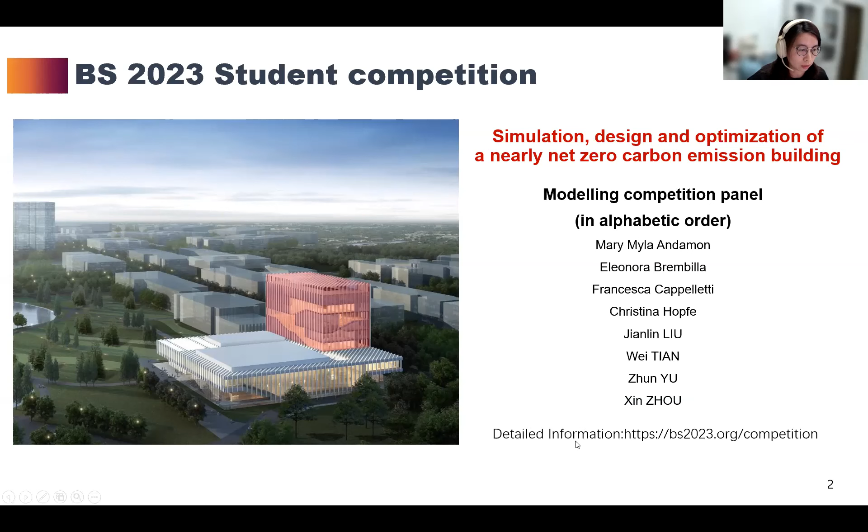For this year's competition, the aim of the exercise is to use computer simulation to design and optimize a building to achieve nearly net zero carbon emission. In setting the theme of this competition, we considered a variety of solutions, including big data analysis, urban energy consumption simulation, and so on.

In the end, we believe building carbon emission is a topic that countries around the world are concerned about at this time. Taking this as the analysis goal in the student competition can stimulate everyone's attention to this topic and has practical application value.

Given the availability of data, we narrowed the analysis down to a single building. At the same time, building carbon emissions cover the entire life cycle of a building and include a lot of content. To simplify and ensure focus, the optimized content only includes carbon emission during the building operation phase, mainly involving the carbon emissions of cooling, heating, lighting, and plug loads.

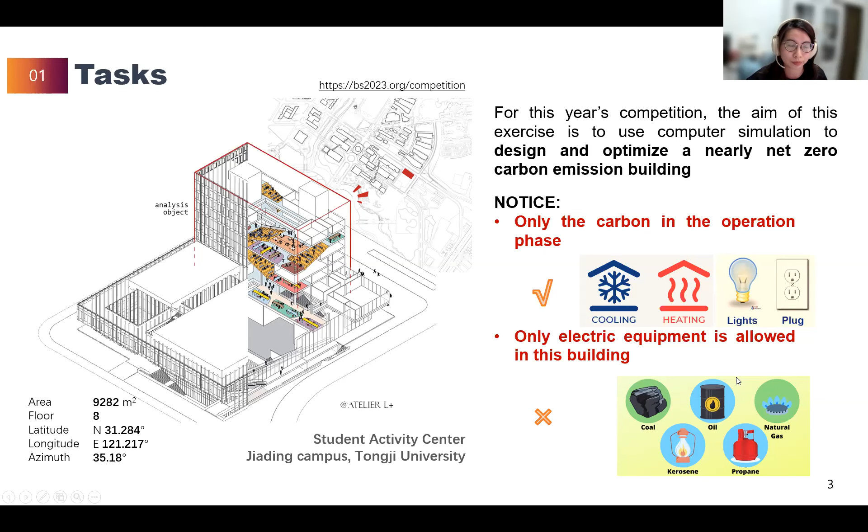It is really important that each modeling competition includes a new challenge. For this year's student competition, participating teams are encouraged to use active measures such as PV, battery, charging pile, or ice storage, and passive measures such as fluctuating room temperature, thermal storage in walls, controllable lighting, and other demand-side management for carbon reduction, which is caused by cooling, heating, and other plug loads in the operation phase.

At the same time, they should also ensure providing comfortable indoor conditions. In terms of methods, we have provided dynamic carbon emission coefficients as optimization constraints. Compared with previous years, the optimized goal this time is new, and the technologies that can be used have not been tried before, including the attempt of demand-side responses.

These contents give the contestants a lot of space for exploration. Entrants are free to propose the heating, cooling, and mechanical ventilation system, but must provide details of this in their report. All entrants must use validated building performance simulation.

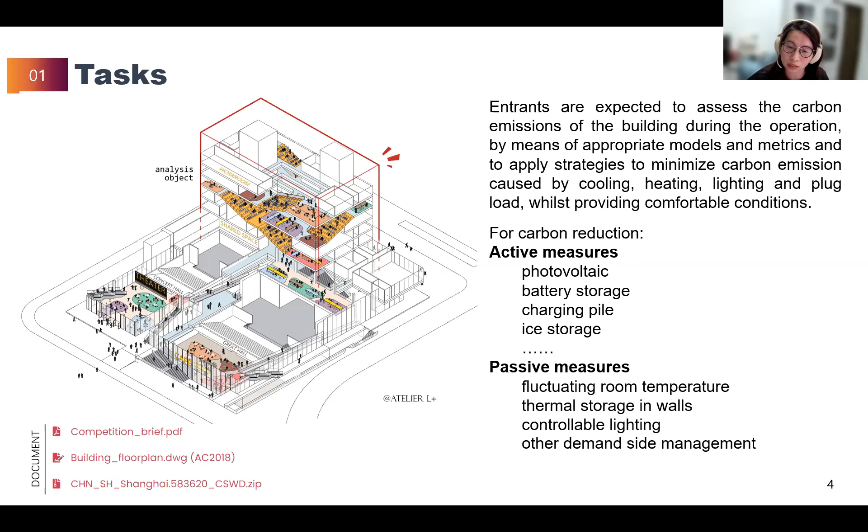First, we can take a close look at the building for analysis. The building selected for this competition is the Students' Activity Center of Tongji University in the Jiading campus in Shanghai, China. The reason for choosing this building is that, on one hand, this building is actually built, and it is also a high-performance green building.

During the BS 2023 meeting, it can also be used as a place to visit, so that everyone has a more realistic sense of participation. On the other hand, the building was designed by Tongji University, and the information is relatively complete.

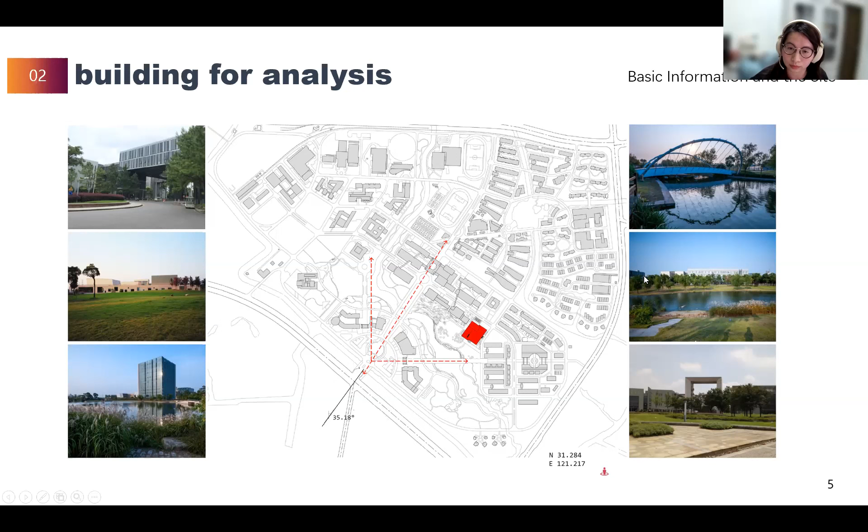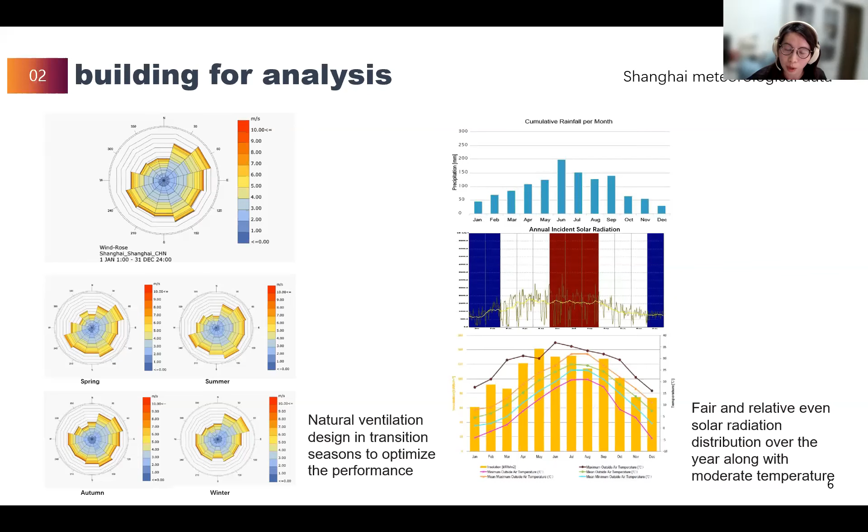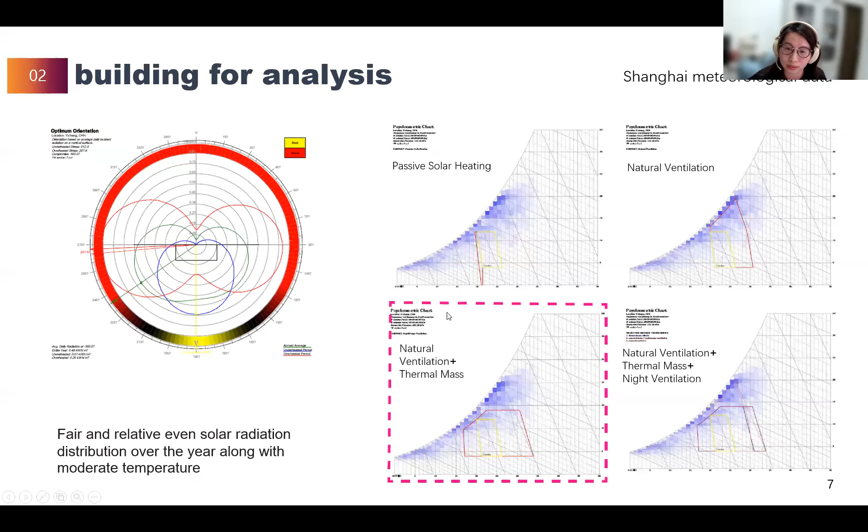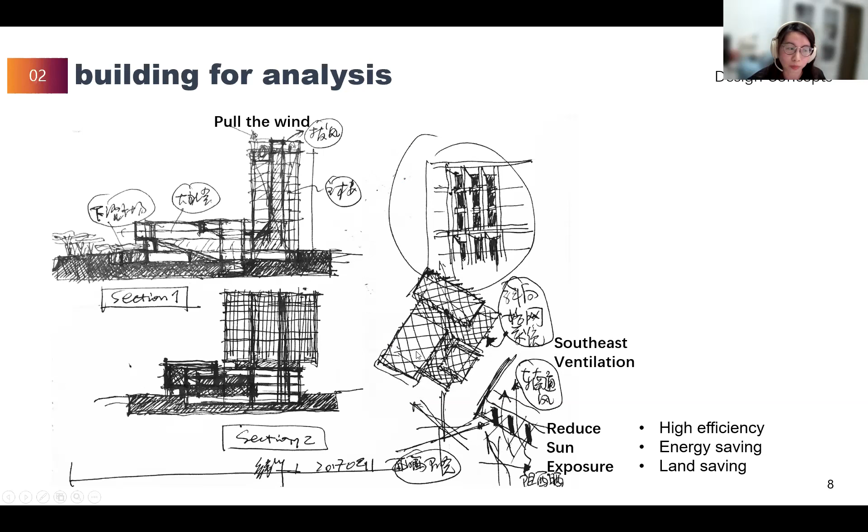The prevailing wind direction in summer is almost parallel to the building. The building facade is made of white concrete slabs, catering to the southeast orientation of the building, forming a vertical sunshade and natural ventilation system. Setting 45-degree angle louvers on the facade may well guide the wind into the room.

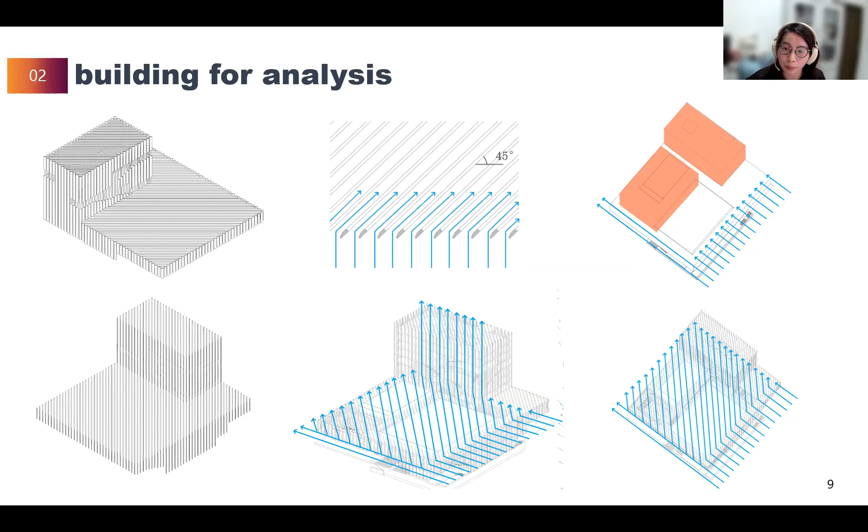In terms of the interior space design, emphasis is placed on the continuation of space to form a coherent flow of space sequence.

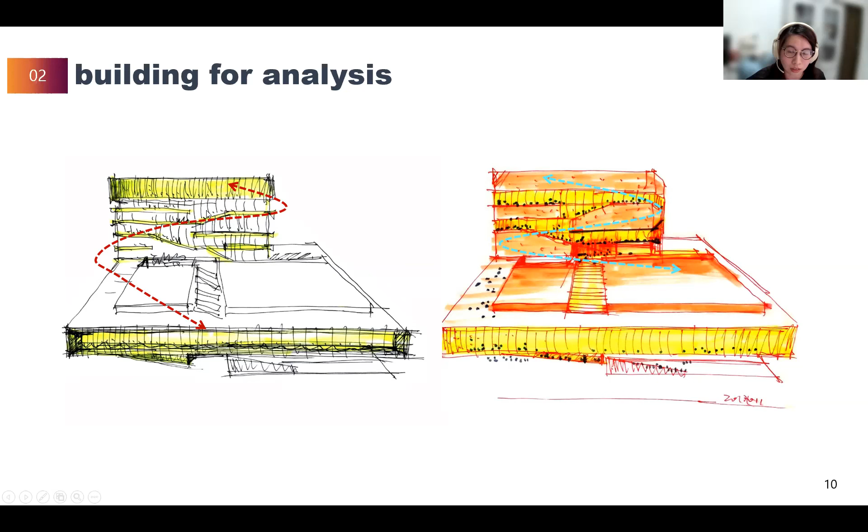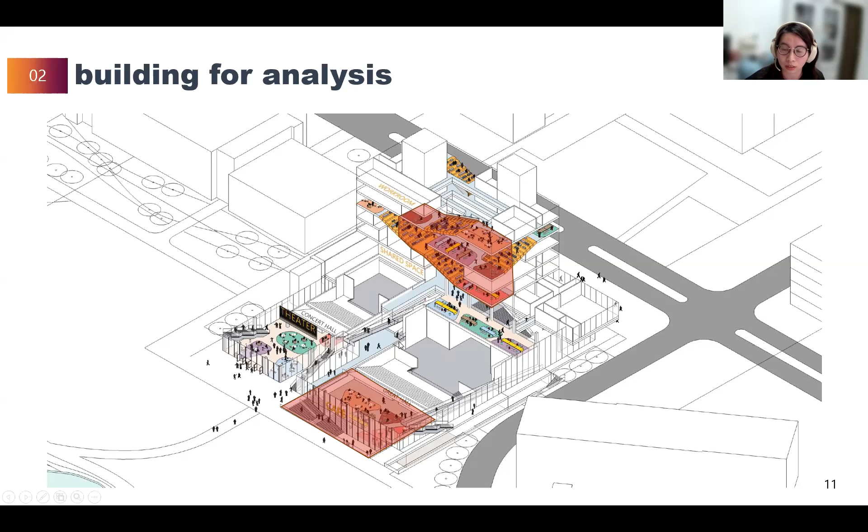In terms of function, a large number of roaming student independent activity spaces are set up. The slope space of the lecture hall on the ground floor is combined with the entrance, and the tower walkway form a continuous space. These have created better conditions for creating natural ventilation.

The total construction area of the whole building is about 21,000 square meters, of which the above ground part is about 15,000 square meters, and the underground part is about 6,000 square meters. The building covers an area of about 6,200 square meters with 8 floors.

It contains many functions such as office of the community, a multifunction hall, training rooms, and art classrooms, and so on. It is a multifunctional complex that provided spaces for offices, meeting, performances, and entertainment services.

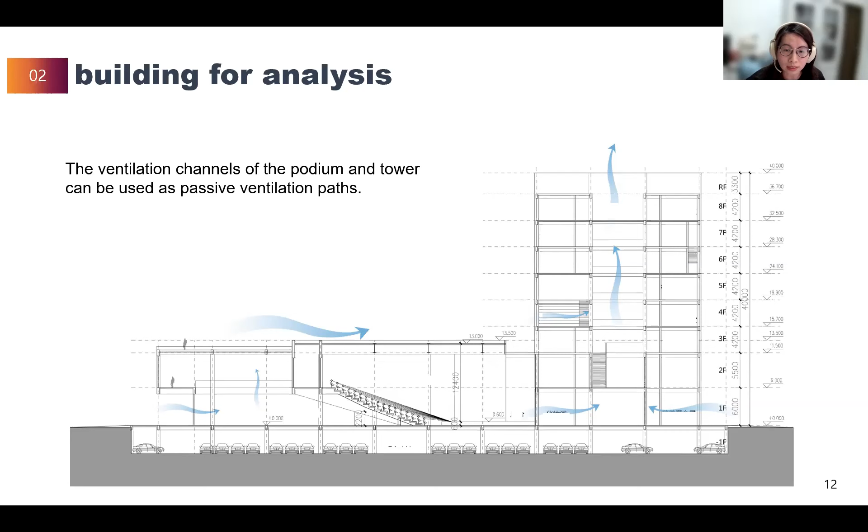Considering that the entire building area is relatively large and there are many complex functional spaces, in order to allow students to focus more on creative design and analysis, we adjusted the building spaces for analysis.

It should be noted that only the energy consumption and carbon emission of the tower part under the typical annual condition are studied, and the energy consumption of the podium part is not included in the analysis. However, the ventilation channel of the podium and the tower can be used as passive ventilation paths.

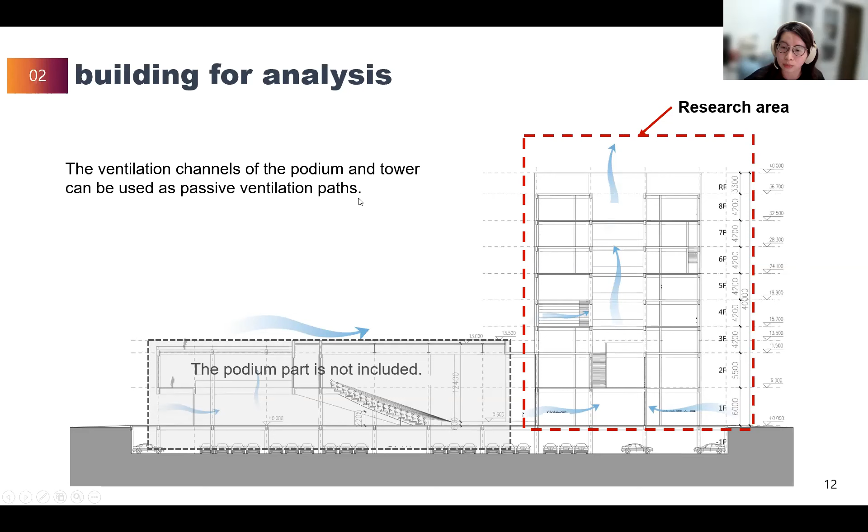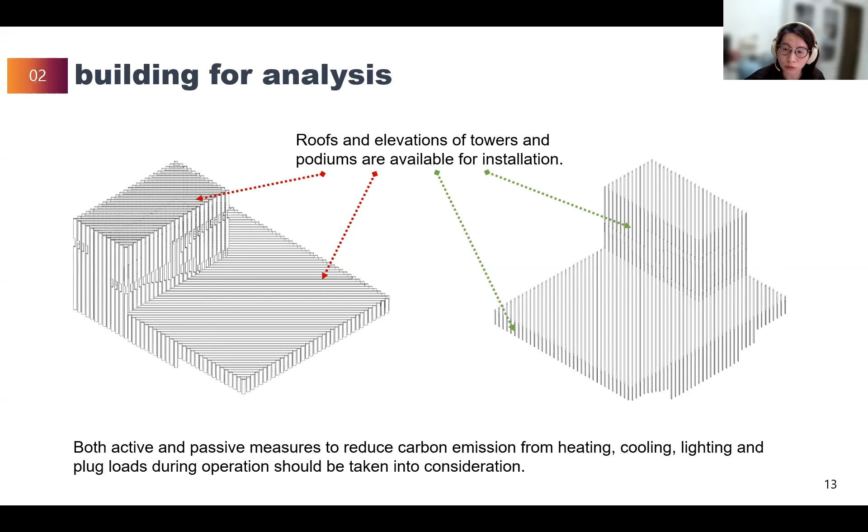As mentioned, both active and passive measures to reduce carbon emission from heating, cooling, lighting, and plug loads during operation should be taken into consideration. Although only the carbon footprint of the tower is analyzed, the roof and elevation of both tower and podiums are available for installation. Other demand-side management measures are also welcome to be considered.

Some constraints have been listed in the briefing document. These constraints must be followed precisely. Any deviation from these requirements may result in disqualification. The intent to set these limitations is to remove uncertainty with many project parameters so that the competitors can concentrate on a specific case on an equal playing field.

For example, entrants are free to choose the design for all aspects of the building envelope if this meets the local standard, referring to the green design standard for public buildings in Shanghai. The design of the building's envelope for this competition should be within the constraints as the table shows, which includes the requirements for windows, roof, walls, and so on. This information can be seen in Appendix B of the briefing document.

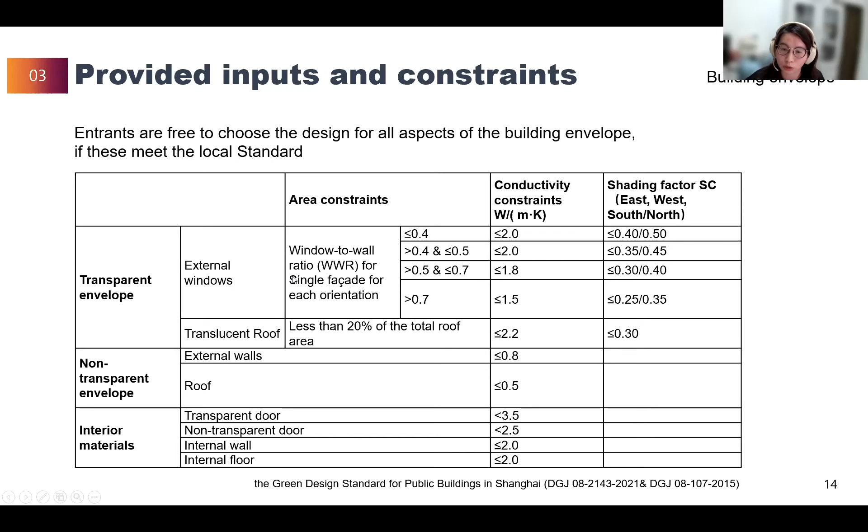Other inputs like the weather: the typical year weather file can be downloaded from the Building Simulation Conference website, provided in the EPW format. As for the comfort condition, when the zone is occupied, it should be maintained between 18 to 26 centigrade. There are no requirements on unoccupied hours, and also no requirement about humidity.

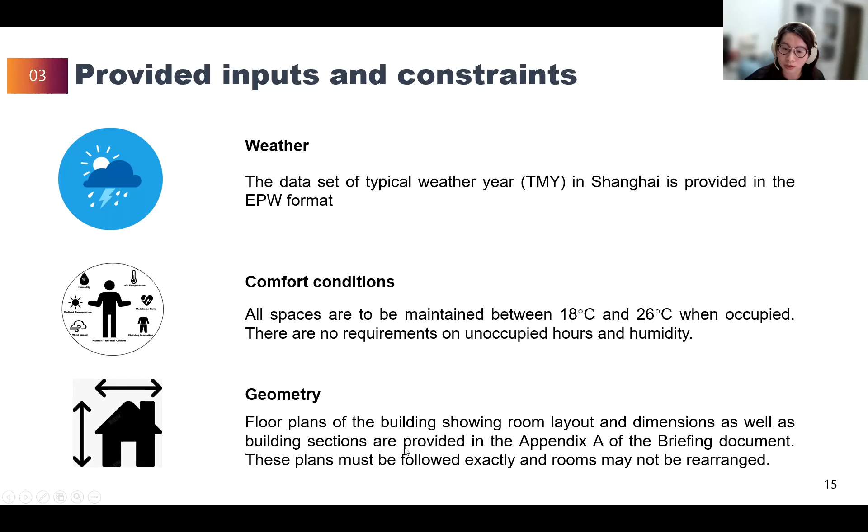We have made some introduction about the building. More detailed information, such as the floor plans, can be found in Appendix A of the briefing document. Also, a very detailed file in DWG format can be found on the website, which can help students build their model. These plans must be followed exactly, and rooms may not be rearranged.

Requirements of the occupancy densities, ventilation, and illuminations is shown in the slide. This is a general requirement. However, if students use a demand-controlled ventilation system, then the requirement for ventilation in the table can be ignored if they can keep the room CO2 level less than 1,000 ppm.

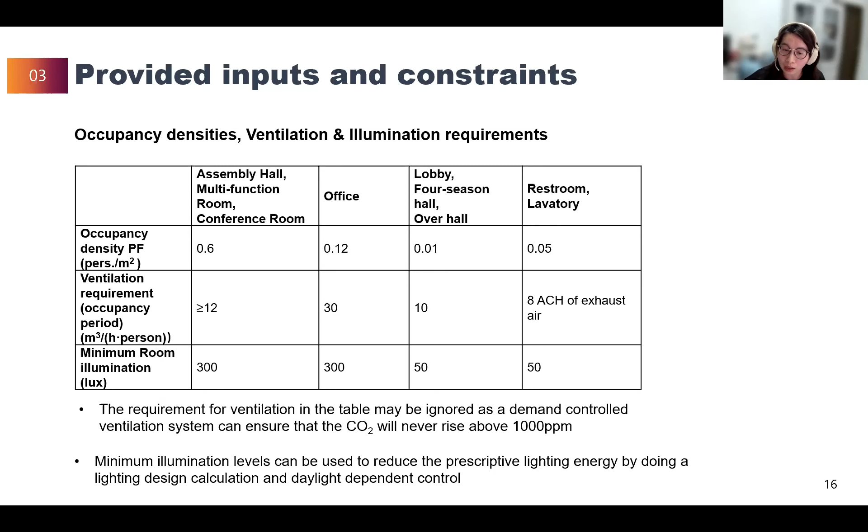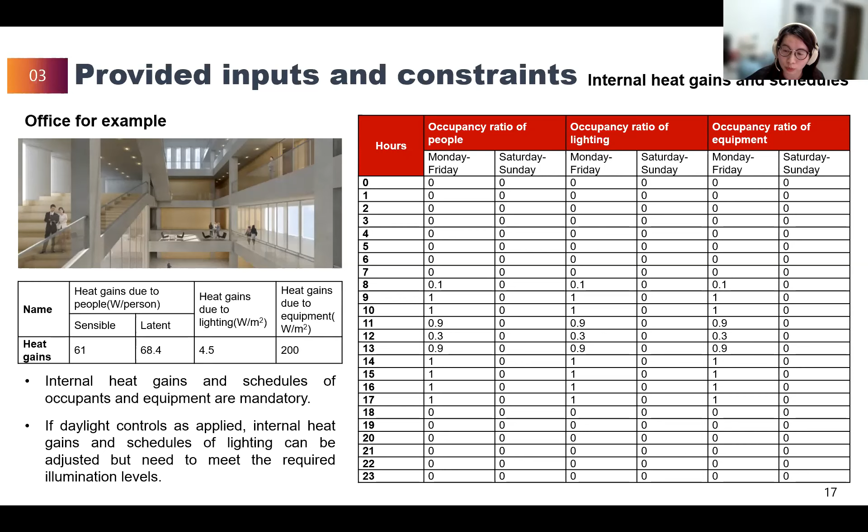Internal heat gains and schedules have also been provided in the document. This slide shows the inputs for office as an example. Here is the requirement for heat gains, and this is for the schedules. It should be noted that the internal heat gains and schedules of occupancy and equipment are mandatory. However, if daylighting controls are applied, then the internal heat gains and schedules of the lighting can be adjusted, but need to meet the required minimum illumination level as the previous slide shows.

Besides, please pay attention to the dynamic carbon emission factor, which is provided in Appendix E of the briefing document. It can be used to convert hourly electricity consumption to hourly carbon emissions for different seasons. Please pay attention to this figure. You can find that at different times of the day, the carbon emission factors are quite different. Students may use this kind of advantage to apply different technologies to find their most suitable application.

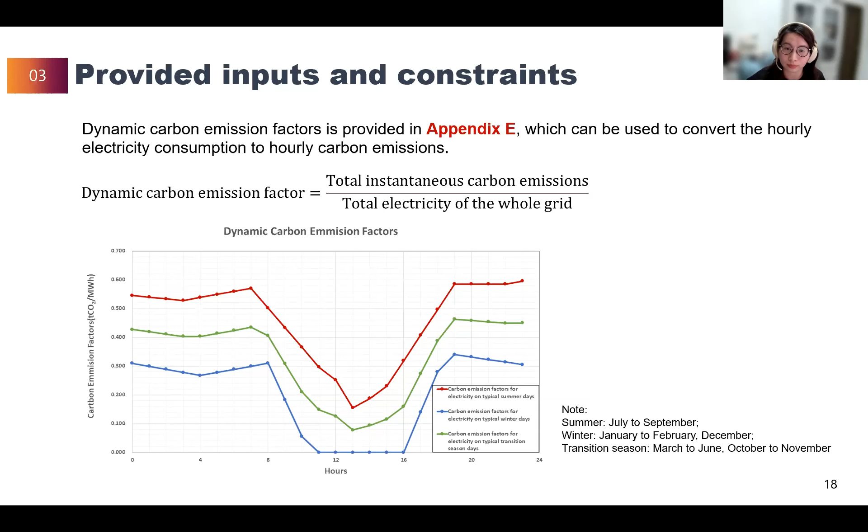Also, some inputs are not restricted for the competition. This suggests that some ingenuity may be put in. Inputs that the design team may decide to vary include the shading, the daylight controls, complete HVAC system—both the air side and water side can be designed. Also, students may design whether and what kind of renewable energy can be applied in this building, and whether the building uses battery or not.

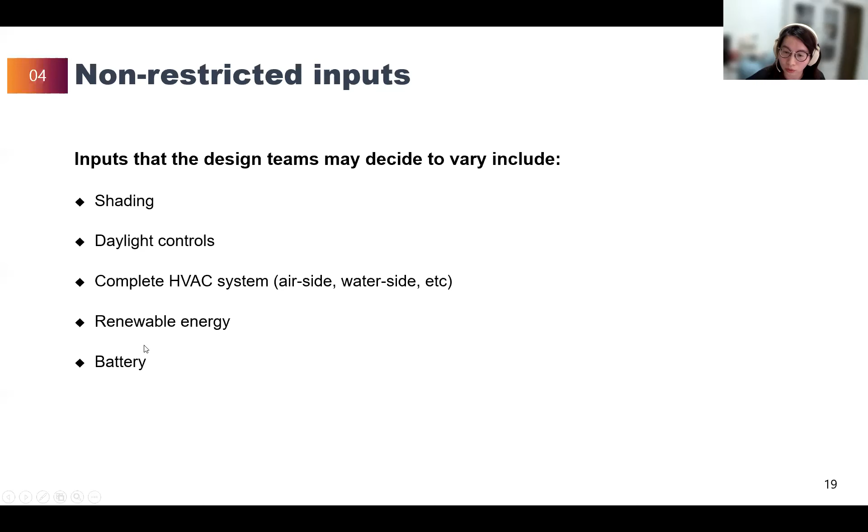For the evaluation criteria, which students may be curious about, we focus on the accurate and intelligent use of building simulation and adequate use of performance metrics. The design feasibility, carbon emission performance, and robustness of the proposal should be presented. Then participants can use a report to demonstrate this information.

Competition submissions can be either individual or group submissions. In case of a group, a group leader should be the corresponding person, and the total number of team members cannot exceed 4.

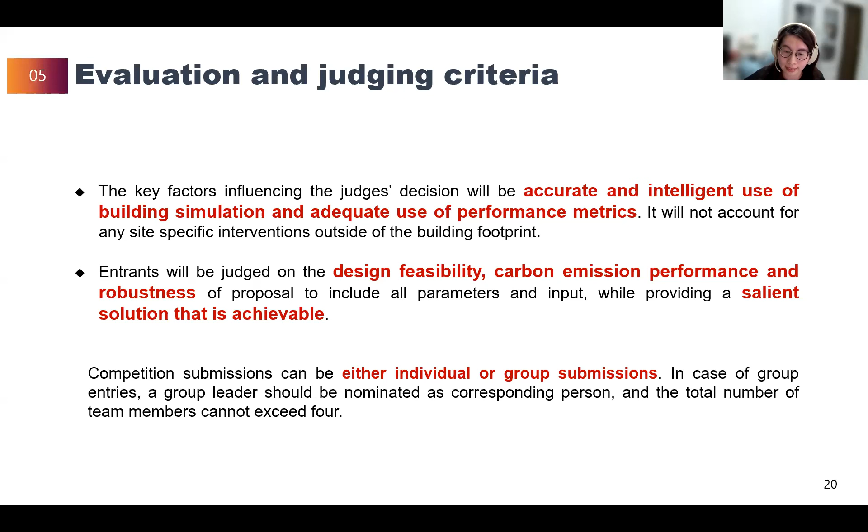Participants are required to submit a report containing the following sections, including A to L. The report should not exceed 20 pages, excluding references and the annex part. Competitors need to make full use of this 20-page report to present their results and show their highlights.

For the enrollment, all entrants must be enrolled as a student—PhD, MSc, BSc, or equivalent—at the time of submission. Entrants must upload some documents as proof of their student status.

As for the notification of finalists, following judging by an expert panel, 2 finalists will be notified by June 1st, 2023, and will receive free registration to BS 2023 and up to $2,000 in reimbursed travel expenses. The 2 finalists will be expected to attend the Building Simulation 2023 conference, prepare a short presentation, and produce a poster for display at the conference. Poster requirements and travel or registration information for the finalists will be provided at that time. Based on the conference presentation and poster, an overall winner will be selected and announced at the conference.